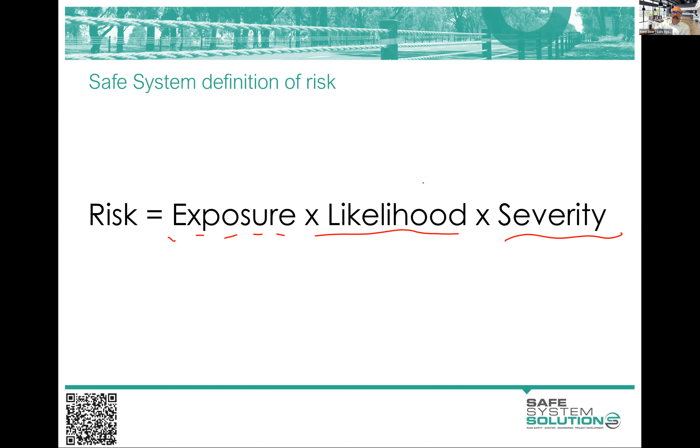So generally, from the assignments we saw there, most people seem to do pretty well at likelihood and reasonably well at severity. We just had a little bit of challenge with exposure, and that's understandable because it's a fairly new concept to extract exposure out of likelihood in a risk perspective. So I'll just remind you a little bit about what I'm talking about when we're thinking about exposure to crashes.

So you remember from one of the earlier modules, I said we can influence exposure by stopping people getting to a conflict point. So we close off an intersection, we close off a road, we've removed the conflict. Or there's that physical separation. So we are giving pedestrians their own space to walk. They don't have to walk on the road. We're giving cyclists their own space. They don't have to mix it with traffic. We remove that exposure in those lengths.

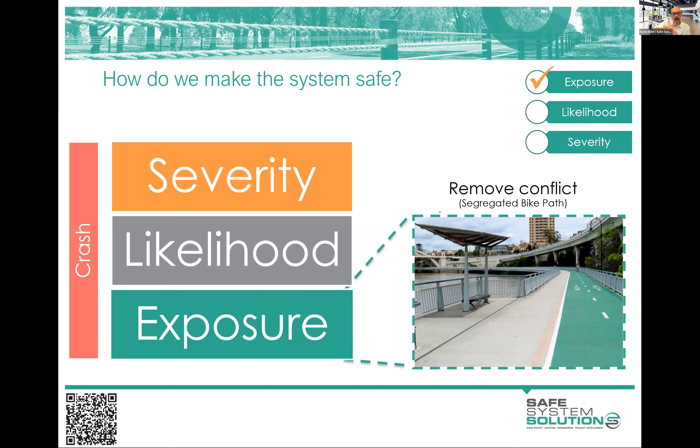So there's some examples of that end outcome, but there is a definition, and I've been slowly building up your understanding of this over time. So exposure refers to which road users in what numbers are using the road and thus exposed to a potential crash. Measures of exposure are AADT, side road traffic volumes, number of motorcyclists, number of cyclists, number of pedestrians walking along the road or crossing the road. So it's about bringing it back to numbers.

So again, let me explain with an intersection example here. We've got an intersection. The exposure is about the AADT, the amount of vehicles, the AADT here as well. The way we could eliminate exposure to a crash type, say intersection crashes between passenger vehicles, is block that road off, make that not an intersection. Then we've eliminated exposure. Or do some measures that reduce the actual numbers we're seeing here, diverting them around or the like.

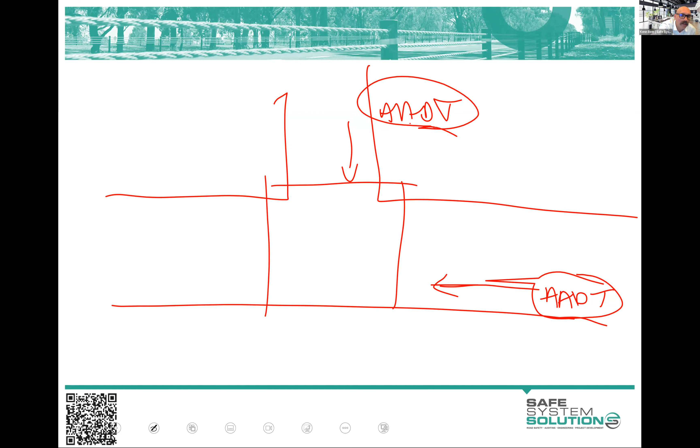Where we actually then do things like maybe a set of traffic signals at this intersection, okay, that doesn't change the exposure because we've still got the same there. We've still got the same there, right? We've lessened the likelihood, haven't we? Because they will know when to stop and when to go, and it's a bit clearer.

But signalizing this doesn't do anything for the severity of crashes because these vehicles can still come here at the same speed, and then they run the red light, and the angle and the speed are still the same, and so the crash outcome will be the same. There's going to be less of those happen because it's signalized, but its severity is still the same. To get that severity down, we would think about maybe a roundabout. We think about potentially raising this, so we're slowing those speeds down. These are the kind of things that address the severity of crash. So hopefully that's helping you get that a little bit clearer in your mind.

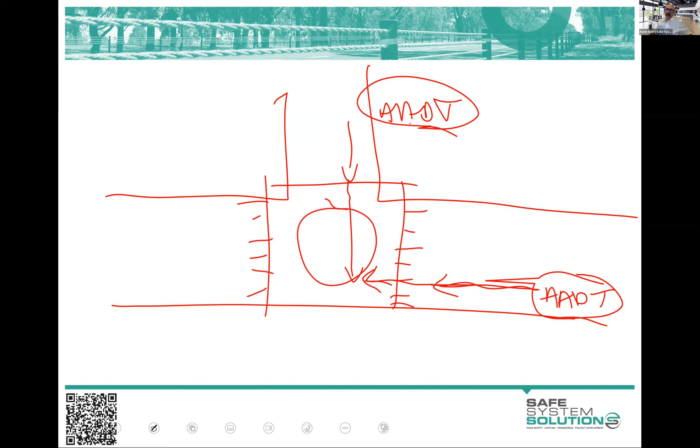So you've got the Safe System Assessment Framework, the Austroads document. That's in the Learning Management System. It talks through a bit of this. We've created these scoring fact sheets to try and help you to clarify some of that exposure, likelihood and severity, to try to deal with issues that aren't well clarified by Austroads or departments around Australia. And we've got one on intersection crashes, how to think about scoring for intersections. Are you adding up the numbers between each leg or the like?

And we've got ones here on cycling facilities. When is a bike lane a change to exposure or likelihood or severity? Well, it's likelihood. Well, what about if we offset it with a couple of meters of hatching or painting? Is that exposure, likelihood or severity? Still likelihood. What if we put a physical barrier system up between the traffic lane and the cyclist? Well, then we're into sort of changing the exposure to crashes.

So we'll make these fact sheets available too. In fact, we've popped that into the resources as well, so you can have a look at those as you're ticking along. Let's jump into a bit of the content for today. As I mentioned, we'll have a break in a little bit and hopefully give you some time back.

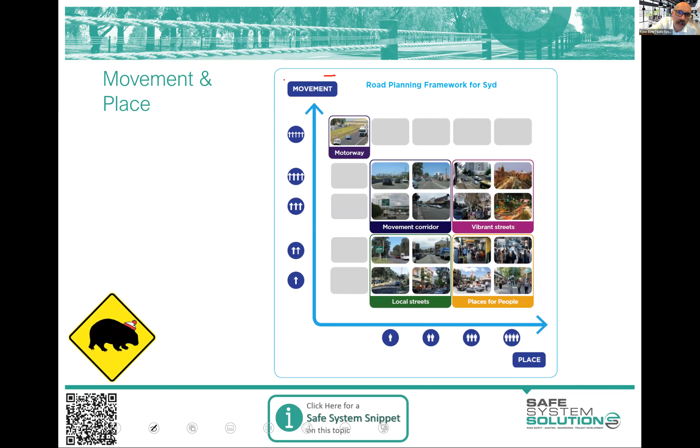But I'm going to use this fairly simplistic diagram of movement and place because I think it's an easy way to get your head around it. This happens to be an old Sydney one, but there's many of them out there I could have used. On the y-axis, we have this term movement. Now, that is the movement of people and goods. It's not necessarily the movement of cars. It could be the movement of bikes. It could be the movement of public transport. It's about movement of people and goods.

The x-axis is place, right? Place value. So this is to say, what is this area in terms of a place for people to congregate, to meet, to socialize, to interact, to trade? And so the recognition here is that roads and streets provide more than just a movement function. They were originally developed often as just movement corridors, there to move vehicles or horses or whatever it was in the day, right?

But then community established around these, and place value was developed. So now we've got an area that is a movement corridor and has some place value. And what we are doing in this movement and place categorization is to start to understand where it fits within that. Is it high place and low movement requirements and aspirations? And if so, we're talking about maybe down here in this category of place for people.

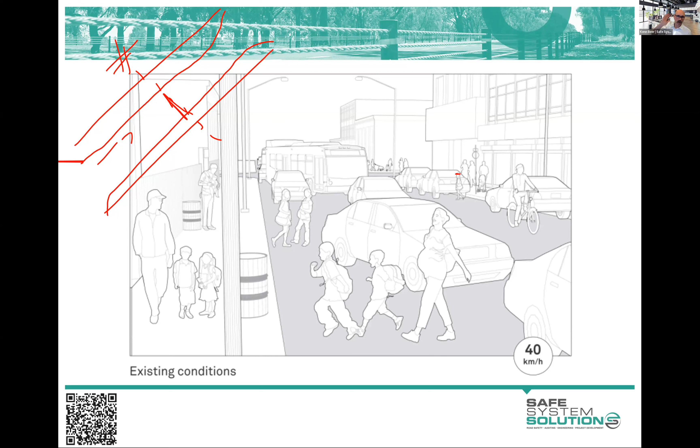Mustafa has come up with one that I think is also prizeworthy: reduce access to vehicles. So, if we've identified this as high place value, why are we letting vehicles through this area in the first place? Your ultimate in high place value areas does not have vehicles. So if you, in your strategic planning of an area, have identified, hey, this is place for people, this is absolutely about place, and we're not thinking about movement, you don't need to provide vehicle access. And that's a really great starting point. And you notice that it flows its way down out of this as more movement requirement is put in there.

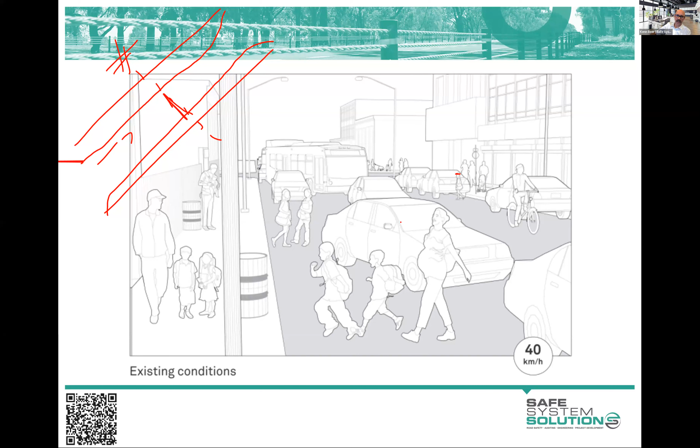Okay. So thank you, everybody. Wonderful contributions. So, artistic impression again here. So take it all with a grain of salt. But you can see here that very much the slow area, wider footpaths, great. You can see immediately it's going to be A, safer, and B, a better place for people. These lower speed areas, I don't think you need designated crossing points. This is shared zone, in my opinion, and you could just sign it shared zone in its own right.

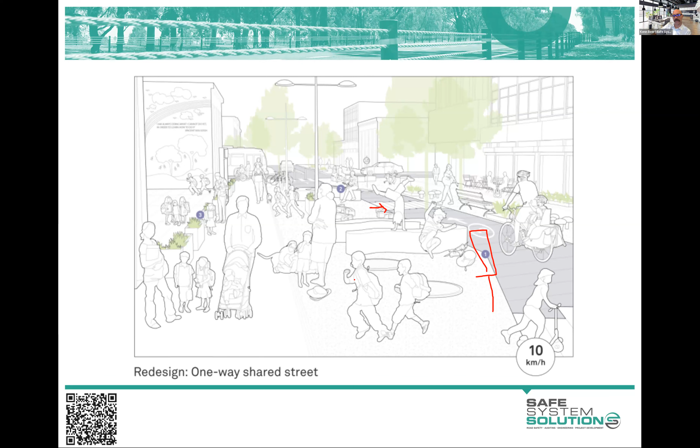In fact, as soon as you designate a crossing point, you've lowered the place value of an area, because you've said that's a road, that's for cars and pedestrians, you can cross there. Of course they're going to cross wherever they want, but it's just immediately starting to lessen place value. As you have more movement required through an area like this is where you start to segregate out modes. Okay, and then you're getting good movement through here for cyclists, and that's a movement corridor, public transport movement corridor, and vehicles can get through as well. But you can still see the place value of it is quite high and quite well retained.

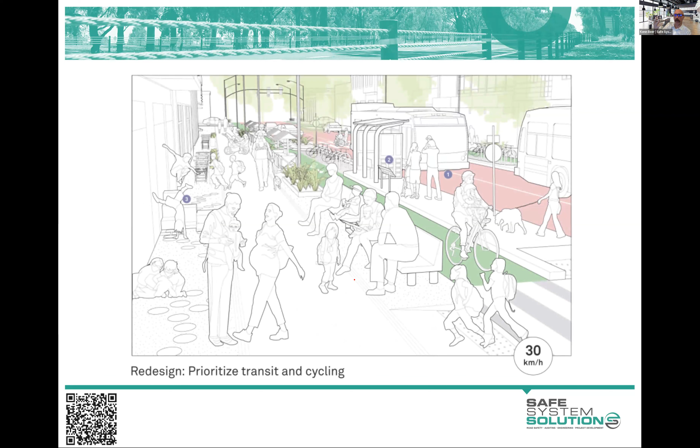Okay, so we could do similar, and we will, through different categories here, but I do want to keep ticking along a little bit. When we get to low place value and low movement, this is what we'll call local streets. Now, local streets is this term which was used in this particular movement and place framework. But I'll just flag that certainly individuals believe their own streets often have high place value. So you can't really talk about it to them like this. But this is a holistic strategic planning framework.

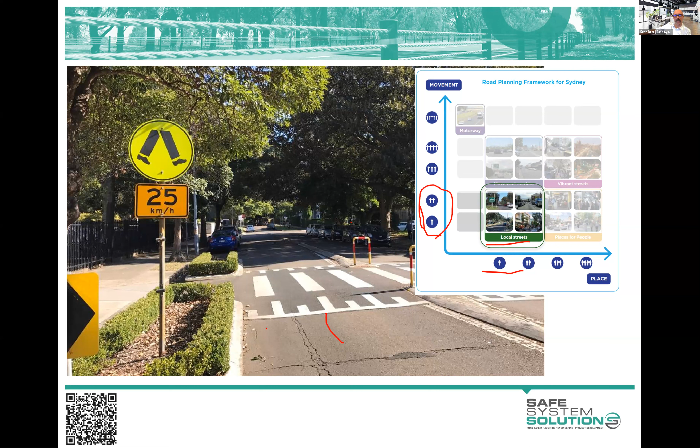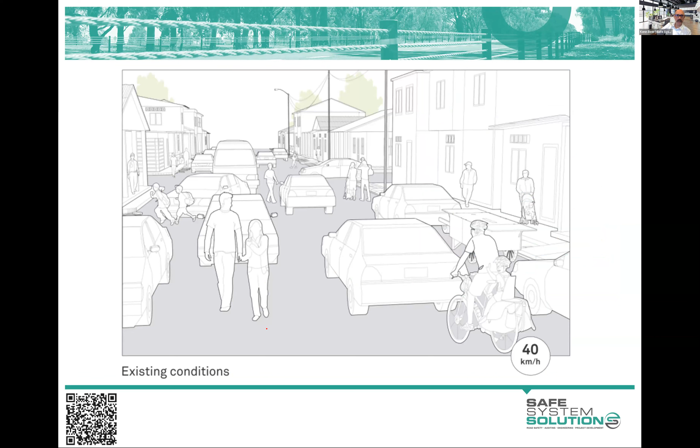But when you are in these situations, you can really start to play on this lower movement requirement and start to do things like restricting vehicle speeds heavily, blocking off through routes, so making it so it's not an easy rat run, and you get some good features through that. So artistic impression here, local street. It's a very busy, built up local street, but again, we can talk about making that narrower, slower, and you do end up getting some more place value out of that.

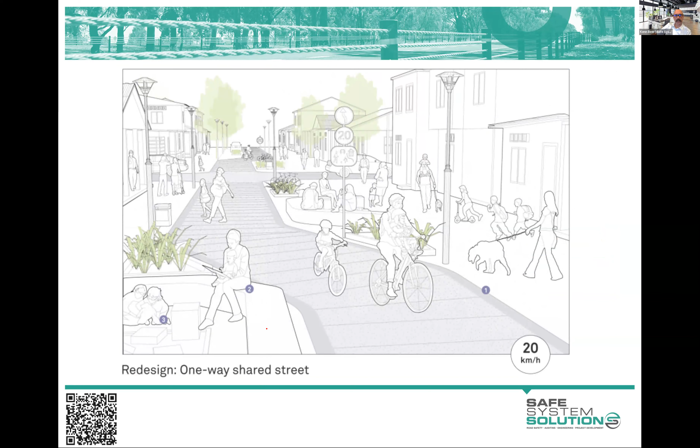But let's go to vibrant streets, and I think I'll actually mix the vibrant streets exercise with our break to give you a nice long break, and we'll do the same exercise as we did with those place for people areas, but we'll do it for vibrant streets.

Now, vibrant streets is where we've got this high place value as we had before. We're trying to make this a really great place to hang out, to socialize, to go for a drink and these sorts of things. But we also have this high-ish movement requirement for people and goods through an area. Now, of course, you're going to need to do a lot more thinking and planning and work to really come up with these things. But let's take this, again, artistic impression.

It's a US diagram, but this is what it currently is. It's got that 70 km/h speed limit. It's got that pedestrian overpass. It's got some fencing. It's got a big wide, lots of traffic lanes. It's got some pedestrian fencing in the middle of the road. We've got bikes going along there. But we want to make this what we call that vibrant streets area. So we want it to have high place value and high movement function.

So I'm going to give you a good sort of 6 or 7 minutes, because this is your chance to go fill up a coffee, have a stretch, and then sit back down and ponder and jot in a few ideas on how we would change this type of road environment to get us better safe system alignment to make the whole thing safer and give us place value, but also give us some sort of movement of people and goods through the area in whatever form that might take.

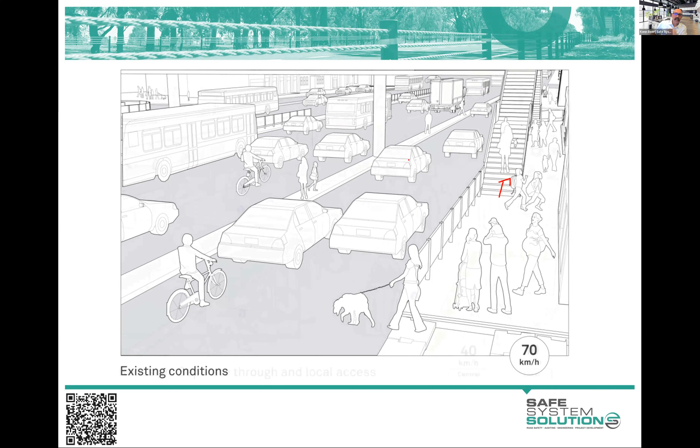But if we look at these sorts of areas, just as many of you came up with there, we can think about those specific modes. We can think about providing great facilities for bikes, for pedestrians to walk, but also have that place feel to it. And you've got good movement function here. You've got movement function of public transport, of cycling, of walking, and yes, you've got some vehicles. If you take a very traditional movement of cars look at this, it's going to be less, but we're trying to move a bit beyond that.

But of course, these are really leaps in the changes to these road environments. What we will see is it sort of trickle in over time.

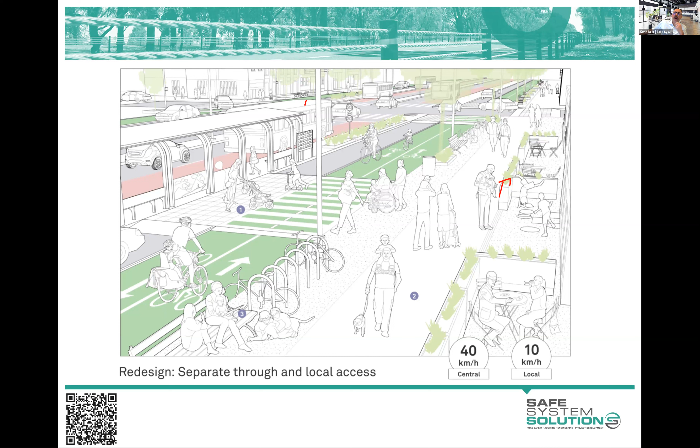We do see some of this sort of stuff. We're seeing now more of these separated cycling facilities entering into these roads, and that's creating good movement. It's starting to add a bit to the place value of areas, as opposed to two lanes of fast moving traffic. We're slowing traffic down. We're creating facilities for pedestrians, for cyclists, and it adds to the place value of an area.

When we get to these sorts of bike facilities, Copenhagen style lanes can be one way, can be two way. We're starting to now think about this as reducing the likelihood of crashes for cyclists. Now, you may argue that it's a reduction in the exposure to cyclists. I would just say in this particular one, I feel that it's too easy for a vehicle to enter that lane and still hit a rider. They could be texting, whatever it is, they enter that, they hit.

Plus, they've got to turn in and out of all these access points, which you can see are highlighted green with some conflict paint. But to say that it would eliminate the exposure to crashes with cyclists, I think is a bit too much. If it was fully barriered off and no access points, then I'm up for calling that exposure. But in that one, I just call it reduction in the likelihood of crashes.

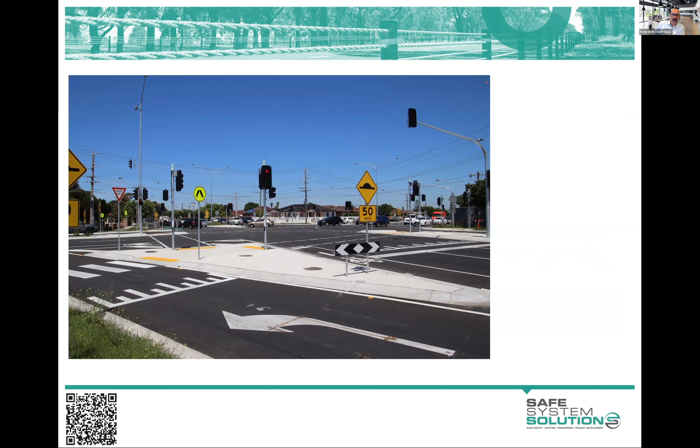But let's have a look at pedestrians and cyclists in particular, and we'll talk about the fact that they are the most vulnerable to injury. I think Jaden nicely put that earlier about thinking about 30 km/h as your highest tolerable speeds, and you really want to be below that in the 20 km/h range where we've got this high potential for pedestrians or cyclists to be hit. Young and old are even more vulnerable to injury, and we really want to get those speeds down.

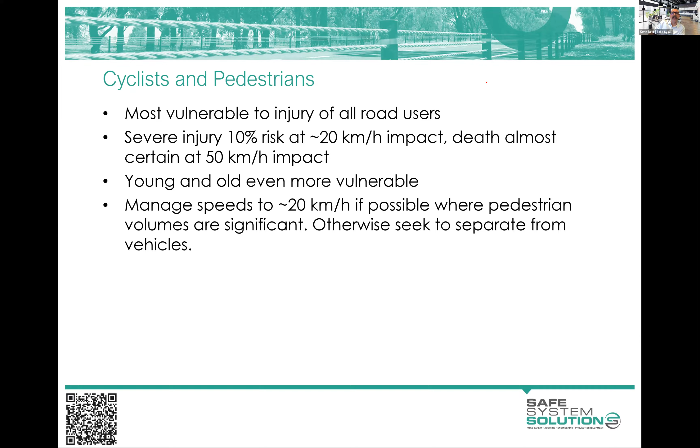So if we start with cyclists and we go back to talking about these separated treatments, they do work really well. Predominantly the idea is to remove the exposure to crashes, move that interaction with vehicles as much as we possibly can. And we see a lot of positive road safety outcomes from this, plus all the spin-off benefits, which as a safe system assessor aren't front of our requirements in the assessment, but we get more people cycling, better environmental outcomes, better social outcomes, and all sorts of wonderful benefits.

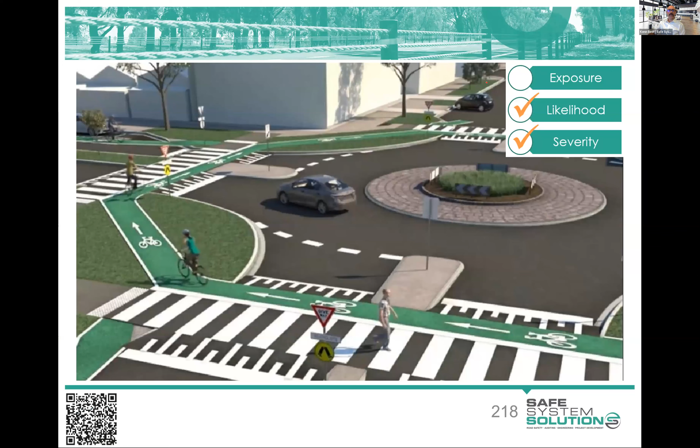When we get to intersections, it can be problematic. Now we know the intersection forms where we've got roundabouts, for example, in these urban single lane roundabouts, getting our best safe system alignment involves that separation and that slowing of vehicles and priority for cyclists. Now, the priority for cyclists is encouraging cycling. It's making it a more friendly cycling environment. The safety outcome of this really comes from clear, raised crossing points, lowering speeds, and that separation of cyclists from the circulating carriageway of vehicles.

So, like for this one, if you haven't seen them before, this is to do a right turn. A cyclist will come up here and they'll go on to their priority area, and then they'll go out there and continue on. Vehicles slow, they give way to pedestrians and cyclists. So there's that one built. That one's a Melbourne example, Moray Street roundabout. You can see there the facility. It has really high alignment with safe system principles. It works really well.

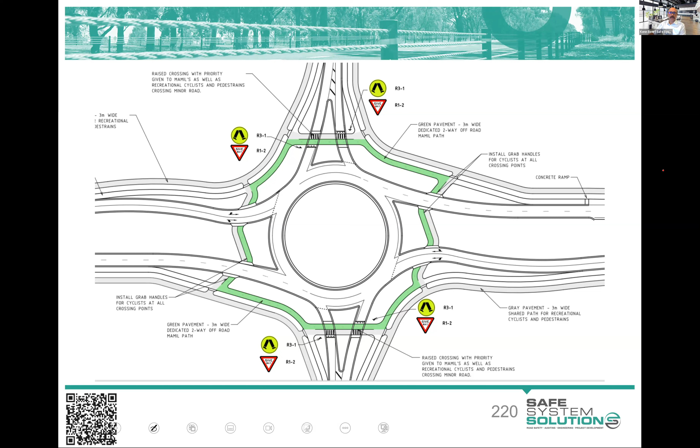In Australia, we're not quite at that. There's lots of different designs coming out, like this one, which has some priority crossings for cyclists and pedestrians. It's also got some designated crossing points which try to reduce the likelihood of a crash as much as possible. But I think we can probably do a bit better than that.

But from a generic safe system philosophy perspective, I think this diagram, which is an adaptation of a Dutch diagram, is pretty good. It's got 0 to 30 as the possibility of having road space shared in one way or another by pedestrians, cyclists and vehicles. Then you're into full, proper separation with curbing and/or parking and the like. And then up at the higher speed end, you want fully separated bike facilities. You don't want bikes anywhere near the roads. It's so far beyond the tolerable limits when a crash happens.

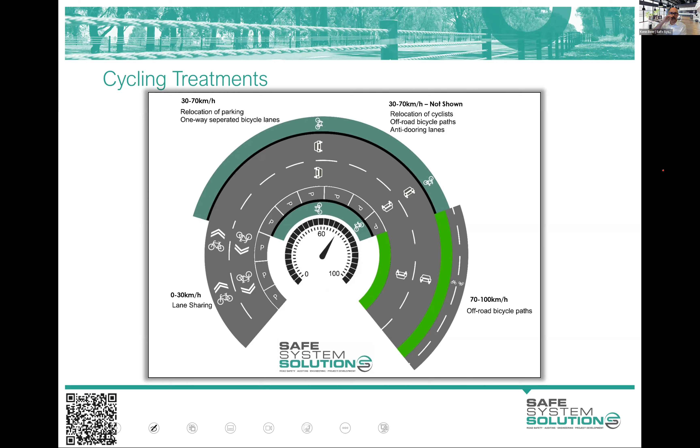So, we still occasionally see new roads at 80 kilometers per hour, duplication jobs, putting bike lanes on the road. That is very far from safe system principles, because we know people will drift out of their lane. The speeds of that impact are just so far beyond tolerable. That's where we need that fully separated facility, to eliminate the exposure to bike crashes.

And they certainly don't do courtesy crossings; that's the other thing they've put a big no on. A courtesy crossing is one where you don't actually have pedestrian priority, but you paint the road and try to make drivers have some courtesy. And yeah, it's just confusion of priority. It's not a good look at all.

I just saw Dylan's question pop up. So it's funny, the 3D crossing in Manly. Lots of these have popped up in recent times. Funnily enough, about 20 years ago, I did a study of perceptual countermeasures, trying to create the impression of a raised treatment in Rutherglen in Victoria, a country town. Some colleagues and I did it. Same principles. We didn't have social media at the time, or maybe more people would have known about it. What we found is that it was effective for about the first week, and then everybody knew it wasn't there.

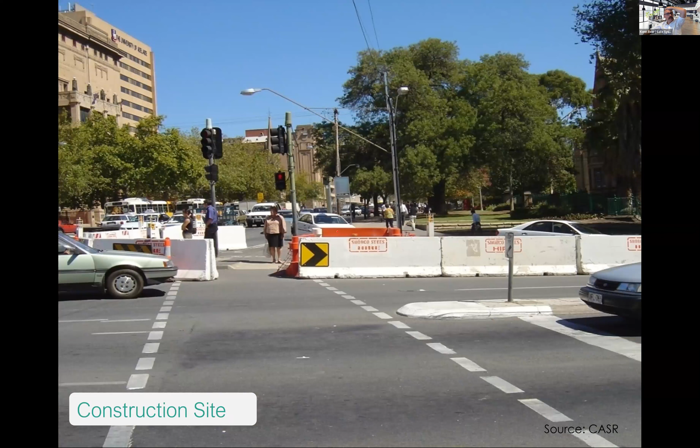An interesting little one I'll just use as a story is that we've known what the safe system is for pedestrians for a long time. And this is an old photo out of Adelaide. So the road speed limit was 60 kilometers per hour here. And then because there was some work happening in the island here behind this barrier, they dropped it to 25 kilometers an hour, which is the South Australian speed limit for work zones.

That could have been a trivia question I asked, actually. That would have been a good one.

It's the only state that does a 25 kilometer per hour work zone speed limit, but nonetheless, so 25. They put up the barrier systems because there were people working in that area. And they did their work. They were doing electrical works and the like, and they finished all of that. And they took away all the barriers and they put the speed limit back up to 60 kilometers per hour. And then about 3,000 pedestrians a day stand in that area waiting to cross the lights and go back and forth.

Now, why are we providing the workers with a safe system, but not the pedestrians who are just trying to cross the road? And some people say, well, it's because the workers are concentrating on their work and the pedestrians should be concentrating on the vehicles and the crossing task. And we know the pedestrians are concentrating on their phone and they're intoxicated and there's all sorts of reasons why they're higher risk than the actual workers themselves.

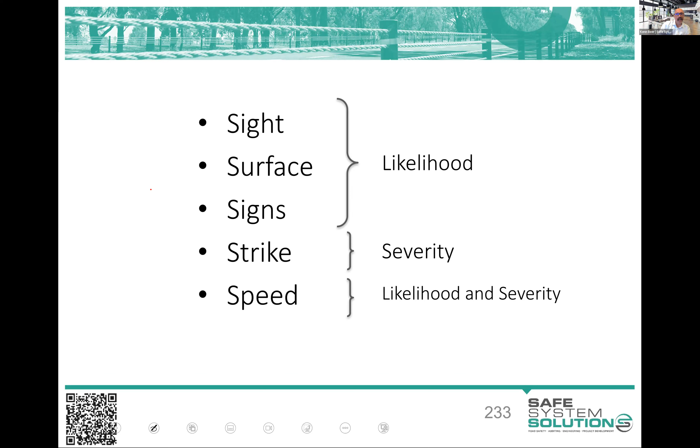So the idea there being that if we can see a motorcyclist better, and if the motorcyclist can see what's coming up, and we've provided a good surface and good warning signs, informing signs, and guiding signs, the likelihood of crashes has been reduced. We then think about, okay, when a rider crashes, what are they hitting? Is it something like a tree, a point source hazard, or is it something that they will run along? And then what's the speed of this? The speed will influence both the chance of the crash and how bad the outcome of that crash is.

So there was some more recent research released in 2019 around crash impact forces and survivability for motorcyclists, for MAIS 3 and fatality, which is a high-level serious injury and fatality. I'll pop them in, you can have a look in more detail in the notes if you want. But what we know is that motorcyclists sit somewhere between cars and pedestrians and cyclists. And I think most of you probably intuitively would have known that. But motorcyclists crashing can take a bit more force than a pedestrian or a cyclist. Now, some people think that's obviously because of the helmet and the like. Yes, the helmets are better.

It's partly that, but from some of this research and a few other reasons, for me it's also to do with the physical stature of a common motorcyclist. We see the bulk of our motorcycle community being a particular cohort, which have a physical stature that can handle more force. And I don't mean that they're all big, strong bikies. I mean that we don't see old, frail people riding motorbikes as much, or very young people riding motorbikes. But we do see them as pedestrians and sometimes a bit more as cyclists. So that's why there's a bit more in there.

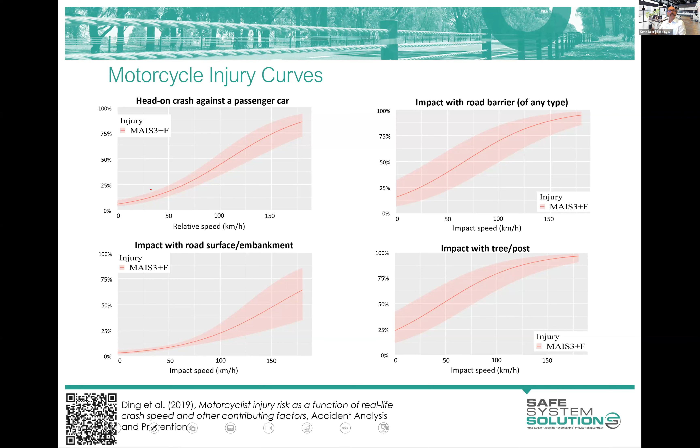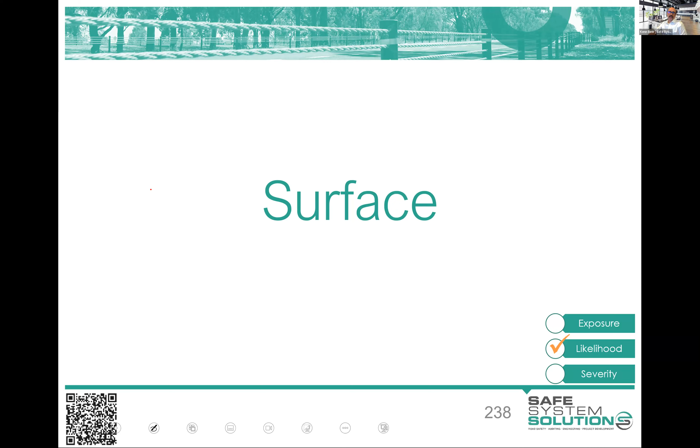Then if we go to the surface, and the surface we provide, motorcyclists take corners and curves on a lean, and thus we have this alteration of center of gravity and this high reliance on the pavement to keep traction and control. So surface conditions are just super important for motorcyclists, well above any other road user. Cyclists have some challenges with surface as well, and it can influence the likelihood of crash, but most cyclists travel at lower speeds, and there's less likelihood and severity of outcome.

But we know that motorcyclists are called the canary in the coal mine when it comes to surface issues. We really need to think about the surface in the sense of potholes, rutting, flushing, bleeding pavements, bad skid resistance, anything in the surface that creates a change in skid resistance or change in surface. We then elevate the likelihood score. That could even be things like steel plates in urban environments, which create slippery surfaces for riders if it's a bit wet.

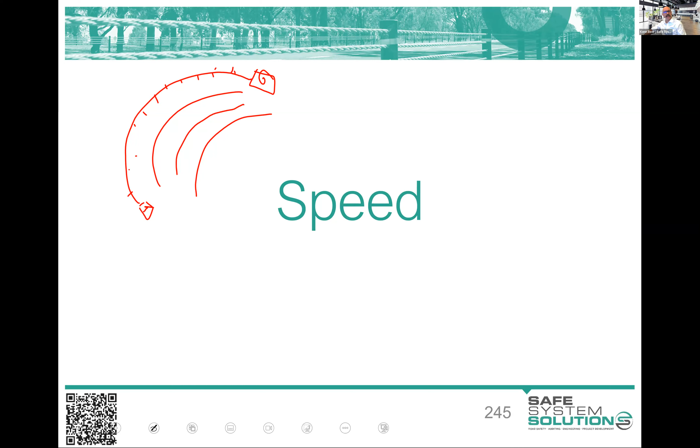Speed's so influential in the likelihood and severity of all crashes on the road network. I mean, we need to, yes, have some ability to move people around the network and vehicles around the network. So I'm not saying make the whole network 20 kilometers an hour. I mean, that would be a very safe system, but we completely acknowledge that we still need to move people and goods around the network.

But you can really influence likelihood and severity of crashes through advisory speeds, regulatory speeds, through the design, narrowing of roads, through local area traffic management. So many ways we can reduce the speed, either at individual locations or along lengths of road. Here's an advisory speed limit sign there, just to recognise that.

Now, I'm not sure if we do or we don't have a quiz. I don't think we probably do for today, so we can probably keep ticking along, or do we? We do have a quiz in the LMS. Oh, I mean a poll, sorry. Oh, sorry. My apologies. I used the wrong term. We do. We've just got one. I wonder what the question is. I can't even remember what I said, but it'll be one just to round out and get people ready for the quiz. It's a true or false. Would you like me to launch that? Sure, launch it. Launch away.